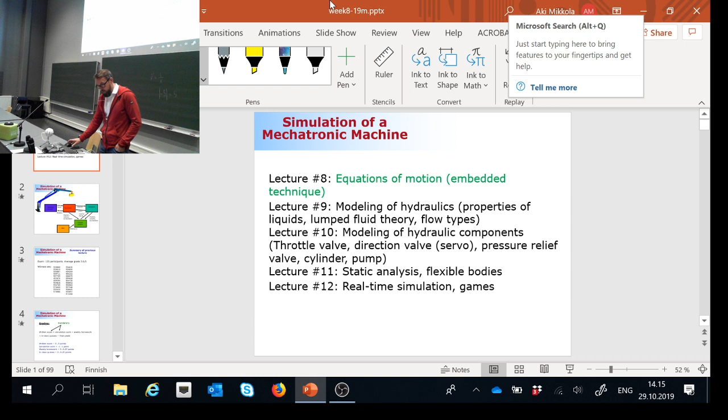All right, so let's get started. It's 2:15, and as you notice, the lecture time is different than what it used to be. Keep in mind it's going to change pretty much every single week from now on. Next week is no longer going to be on Tuesday, but on Thursday, and the time will be different too, I believe. So put that in your calendar, otherwise it will be very difficult to follow the lectures.

Again, what you need to do in this second period is follow the lectures every single week, because otherwise you will soon recognize that you're completely off and have no understanding of what the subject matter is about. Okay, so what happens in this period?

I'm planning to deliver 5 lectures. They may be 6 lectures depending on my speed, depending on your activity, depending on how much you want to discuss with me. But what's in my original schedule is 5 lectures.

Today we'll get started by looking one more time at multi-body system dynamics. And by the way, this will absolutely be the last time we look at that. We are not going to revisit that topic any longer once today's lecture is done.

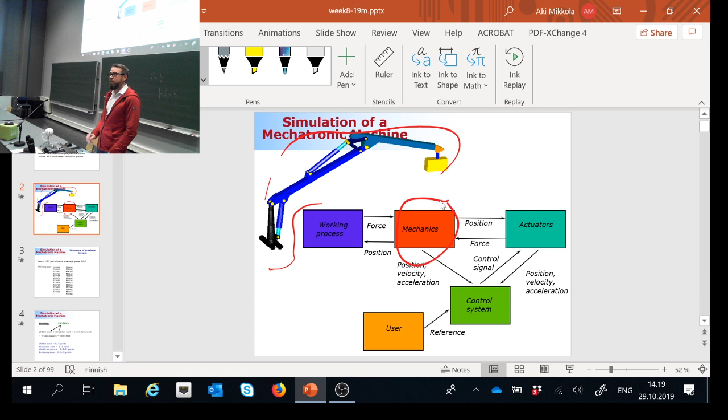And we know how to model them now using multi-body system dynamics. But you know that the mechanical structure is not the machine if there are no actuators. So there has to be a means of introducing motion and forces to a mechanical structure. And those means could be many different ways that you can make it happen.

You can use hydraulics, which is very often used because the power density is very high. But they could also be electric drives, pneumatics, water hydraulics and so on. So it's a wide variety of different options. This course we're going to just look at one option, and that's hydraulics. That's going to cover this box here.

Shortly, I will explain how a control scheme can be added to your simulation model. And then when I'm explaining about real-time simulation, that's the way you can account for the user in your models, because in real-time simulation models, the operator is a user. So that gives you a little bit of understanding how that is possible. We're really not going to touch much on the working environment because that varies so much depending on the application. But there are some examples I'm introducing in that real-time simulation / gamification lecture. Okay, so that's what's going to happen.

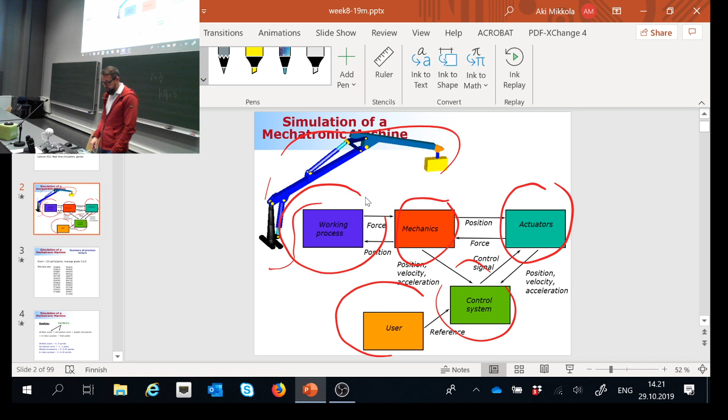So, midterm exam. I got a total of 125 participants, which is a good number. I believe there are 145 students registered to this course, so 20 students disappeared. I don't know what happened to them, but obviously they did not participate in the midterm exam.

Average in total was 3.6 out of 5, so 5 is the maximum. In my mind, you were scoring really well, really well. And then we got a bunch of students who were scoring 5 out of 5. The exam was constructed such that scoring 5 out of 5 was very, very difficult to do. Even a minor mistake, minor misinterpretation in one single incident was enough to lower your points such that you were scoring 4 out of 5. 5 out of 5 is an absolutely outstanding achievement.

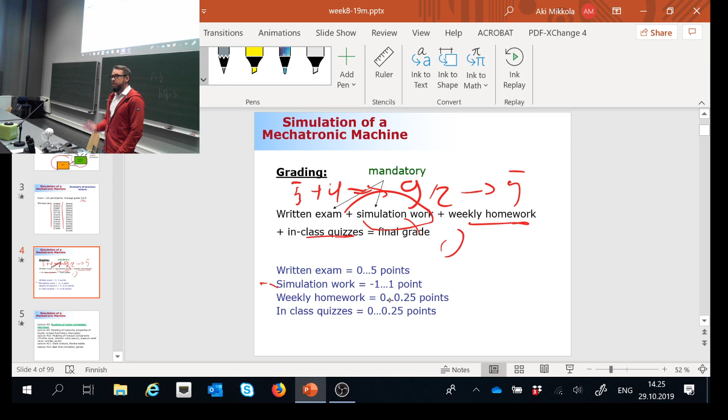Now, simulation work, as listed here, can give you 1 additional point. That's not very common; the common scenario is that you get 0, meaning it will not affect your grade at all. Okay, so let's hypothetically say simulation work will be worth 0. Still, it's going to be 5, and then you're doing your weekly homework and in-class quizzes. Both will give you 0.25 points. So here's 0.25, here's another 0.25. When you put these together, it's going to be 0.5, and it will be rounded up again. So 5 plus 0.5 will be 6. 6 out of 5.

But that's the time when the student affairs office comes after me and says, Aki, you lost your mind. You know, this is not possible, this is not physically possible anymore. So maximum point is 5 out of 5.

Keep that in mind, because of course I would like you to learn and I would like you to enjoy this course. But unofficially, I know this goes to streams and it's going to be recording, but unofficially, I would like you to follow the principle called minimum energy principle. You know what that is?

Minimum energy to scoring high. If you're scoring 6 out of 5, you end up to have 5 out of 5 as your final grade. So you are investing too much energy for this one single course, because there are other courses as well. So keep in mind that the 5 out of 5 is absolute maximum, and that already is a very, very good number. If you're scoring 3 out of 5, that already is very good. So this course is important, but other courses as well, trying to maintain the balance, such that you're scoring high from these courses and scoring high from other courses as well.

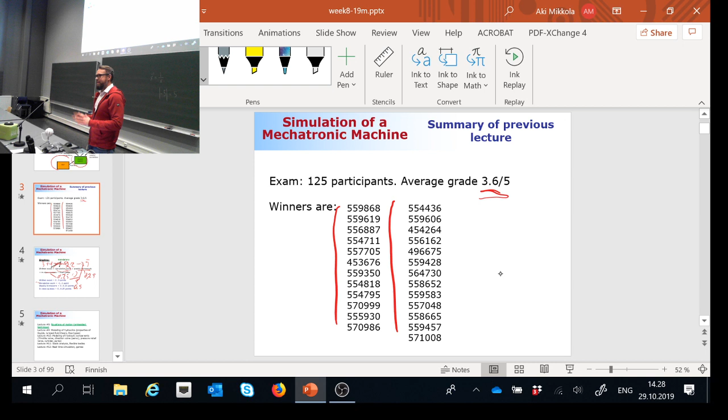Remember just one example, there was a simple case about a beam-like body. Remember, it was like this. And then there was a particle at the end of the beam-like body that was located here. And then the global coordinate system was located at the origin of this beam-like body. And then there was a body reference coordinate system.

It was mentioned that this angle here was 45 degrees. You remember that? And the question was where this point is located with respect to the global coordinate system. But honestly, do you need that information to solve it? You don't. It was obviously visible in the picture, on a figure like that, but you don't need it, because you can solve the problem by using common sense.

Of course, there's a little bit of confusion, because I'm always telling you that you are never ever allowed to take a shortcut. But I also say that you're allowed to use common sense. Or did I? I did. Okay, that's good. So then I'm safe. I did not mention anything about common sense. Or did I? I said, okay, here's when you need to use your common sense. Because of course you can solve this by using the equation that we are very much familiar with.

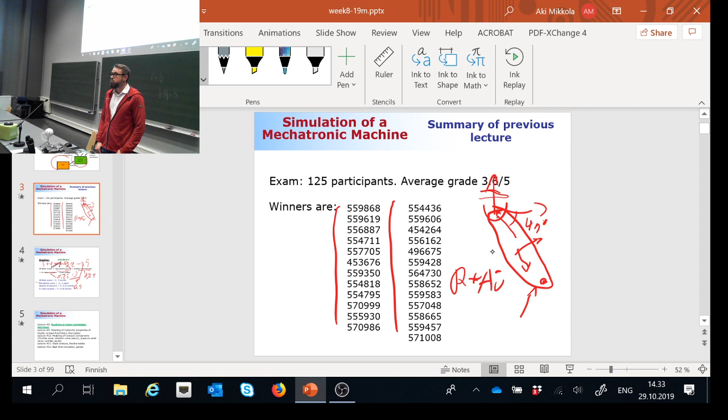Any thoughts? Was the exam fair? I admit there's a problem with it—it's very black and white. If you answer incorrectly you get 0 points, and if correct you get full points. That's something we worked on over the summer, and it will be available for next year's students: instead of just black and white, if you enter an answer incorrectly it gives a warning that it's not correct, lets you think again, but this time reduces the maximum points. That's the improvement I'd like to introduce. No thoughts, no discussion? Okay, I'm happy if you're happy.

Now we'll make one more final effort and look at an alternative way to construct the equation of motion, not based on Lagrange multipliers. Remember a few weeks back, when I explained Lagrange multipliers, there was a mathematical example where we found an extreme of a function obeying a constraint, and I introduced two alternative ways to do that. One way is adding the constraint to the original function with Lagrange multipliers—that's the augmented formulation we did. But there was an alternative where we substituted the constraint inside the original function. We can follow that procedure in multi-body system dynamics too, substituting the constraint inside the equation of motion. This is handy because it produces a minimum number of differential equations. Previously we added constraints, increasing the number of unknowns; this time we eliminate unknowns, so a system with 1 degree of freedom, regardless of the original number of generalized coordinates, needs only 1 differential equation to solve the response. That's what I'll explain next, and then we'll move on to hydraulics.

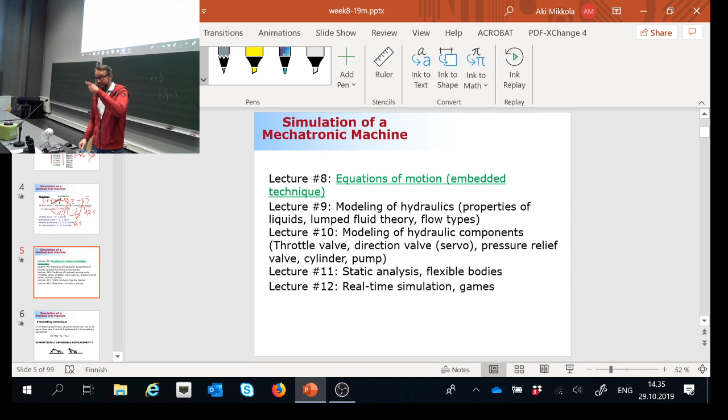All right, so the embedded technique—let's get started, let me explain the whole story, let me show how it goes. This story makes sense, at least in the beginning. Towards the end we approach a phase with a bit more involved mathematics, but it's very important that in the beginning you pay full attention to the concept itself, because that's what I expect you to understand—how this differs from the augmented formulation.

Everything started from this equation we obtained a couple weeks back: the equation you get when you set the virtual work done by externally applied forces equal to the virtual work done by inertial forces. Here we have generalized inertial forces—mass multiplied by acceleration, plus the quadratic velocity vector. Externally applied forces are expressed with this vector, the generalized externally applied forces. So external applied forces and inertial forces are set equal. Now, in general you cannot set this equation equal to zero, and indeed you cannot.

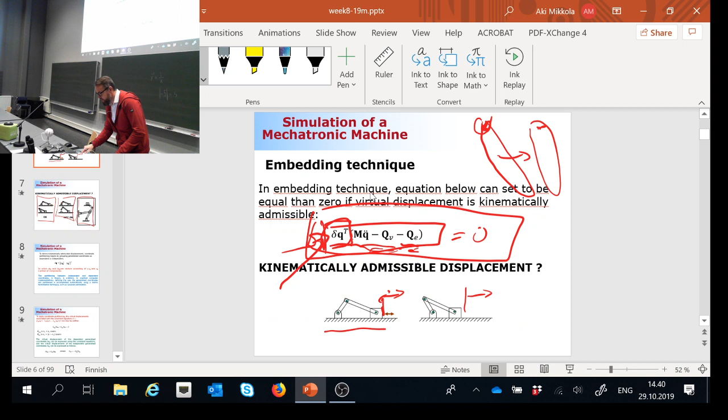So the ultimate goal is to express virtual displacement such that it is kinematically possible, in an automated way, because we cannot do this manually. We could do it in the case of a crankshaft mechanism like this, but in the case of a mechanism like this one here, it becomes too heavy to do. That's why we have to find an automated way to make it happen. Now the automated way is as follows.

So we're going to take a look at the coordinates that are defining our system. Remember, those coordinates are called generalized coordinates. Now what we're going to do is categorize these coordinates into two different categories: the one that is called dependent coordinates - I'll get back to that, what are the dependent coordinates - and then the rest will be called independent coordinates.

Generally speaking, you can do this selection as you want. There are some rules - we'll get back to those - but for sake of simplicity this time, let's just say you can do the selection as you please. The only important thing here is the number: how many coordinates have to be set as dependent coordinates? Well, the number of dependent coordinates has to be equal to the number of constraints in your system. Let's get back to this crankshaft mechanism, the one shown here.

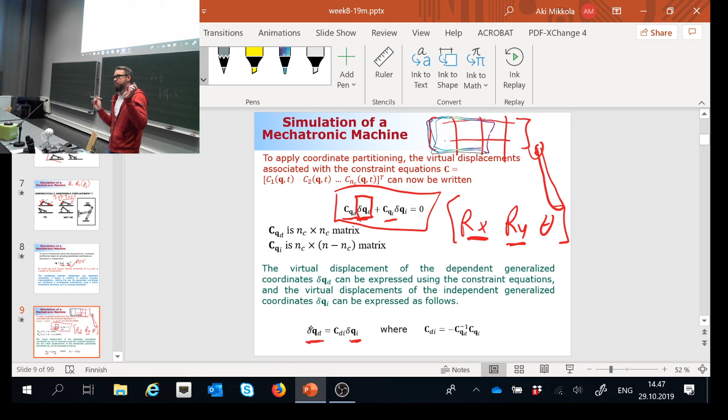Why do I want to do that? Because once I use this equation here, it is possible to solve for the dependent coordinates from the equation. And the dependent coordinates can be written as shown here, with the help of the independent coordinates. So that's the trick I wanted to do: I wanted to find a relation between the independent and dependent generalized coordinates. And actually, what I wanted to do is find a relation between the independent generalized coordinates and all the generalized coordinates. That's really what I would like to do.

So, but I'm very close to doing it, almost there. Don't need much to finalize the thing. Okay, what I have here, what is the mapping here? The mapping is that the dependent part of the Jacobian matrix is inverted and then multiplied by the independent part.

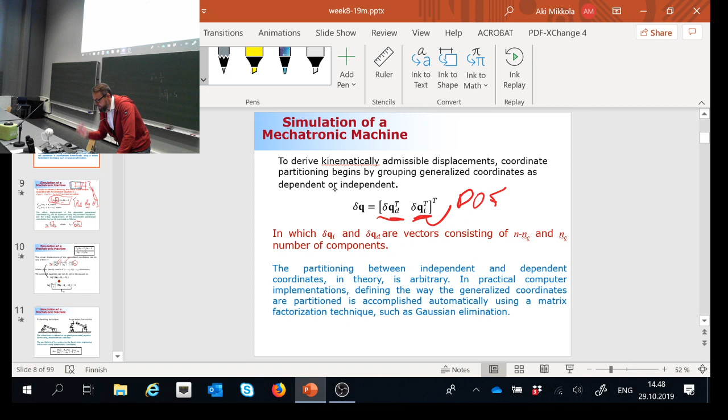You follow me? We're going to take a look at an example in a second, so that's when things become clear to you. Now, all the generalized coordinates can be written as dependent and independent. Using the relation defined in a previous slide, you can find a relationship between independent generalized coordinates and all the generalized coordinates, like here.

So that's exactly what I need. That's what I'm after all the time. Why is this important? Because now it is possible to use this relation here, substitute it here in this equation, and express the virtual displacement using independent generalized coordinates only, and others will follow.

Why is this important? It's important because then it is possible to introduce the virtual displacement in a way that is kinematically possible. Let me summarize this shortly. This is how you can express the virtual displacement such that it is kinematically possible.

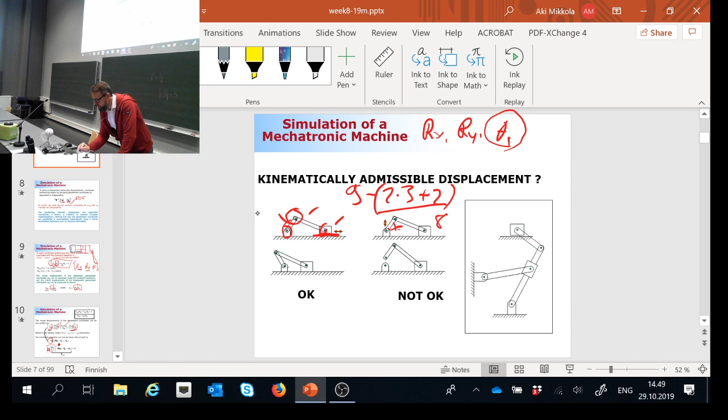So again, let me go up here. Let me explain it here. Let me go even up here. So this is where I'm going to get started. This is a short summary.

My ultimate goal here is to express this virtual displacement such that it is kinematically possible. I'm going to do this by using independent generalized coordinates, and the number of independent generalized coordinates equals the number of degrees of freedom. Then I'm going to make it possible so that other coordinates follow according to constraints. This is done by categorizing coordinates into dependent and independent.

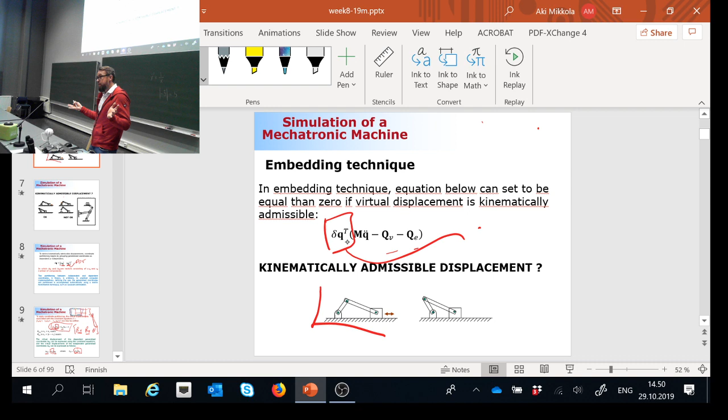And again, you can do this selection as you want. Then you go ahead and use this same selection in your Jacobian matrix. Once you do it in your Jacobian matrix, you can find the relation between the independent and dependent generalized coordinates. This happens with help of constraints, because the Jacobian matrix tells you, if you introduce motion to one coordinate, how the other coordinates will follow.

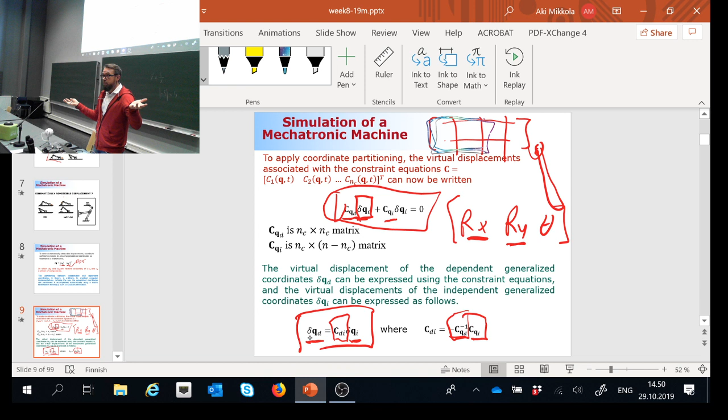Okay, makes sense? Now you use this relation, as shown here, in your expression of the equation of motion, and now you can set this equation of motion equal to 0. Now you have only a very small number of differential equations, because look what's here - this is only independent generalized coordinates, nothing else.

Make sense? Is it difficult? It is difficult, I can admit that. Again, I was telling you this story that this course is pretty much downhill from this point on, just enjoying life and talking about the weather and so on. It's going to be simple, but there is this one tiny rock in your way.

So this final embedded method - once we're done with that, then we're going to move on to hydraulics. We are not yet completed with the story, but let me ask if you got the concept, because this is a really essential part of this method. You got it? What is that?

Mathematically - okay, so mathematically, well physically, it means that if you have this connection rod, you can select one coordinate and the other coordinates will follow, because there is 1 degree of freedom in the system. So you can select pretty much whatever coordinate you want.

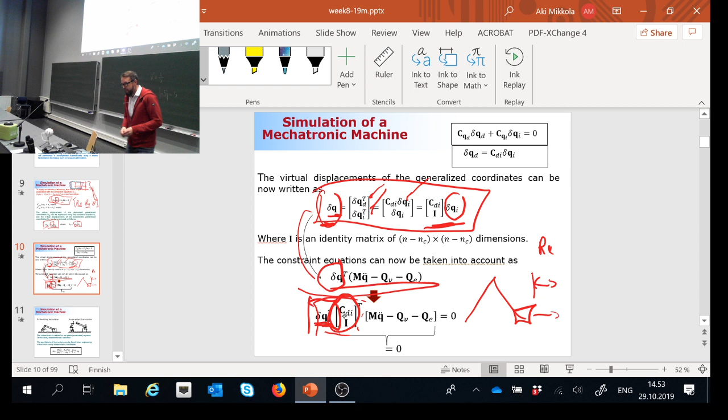Okay, so if I move it like here, if the piston goes here, then these two bodies will follow in a certain way, and this certain way is expressed here. That's how it goes, that's the idea - that's the whole idea behind this embedded method. All right, so let's move on.

Really, the big difference between this method and the augmented formulation, where we introduce the constraint with help of Lagrange multipliers - this is a summary of that. In an embedded technique, we are just looking at the generalized coordinates for the system that consists of 1 degree of freedom. If there were 2 degrees of freedom, then I need 2 coordinates to solve it, not more than that. But once I follow this procedure, I don't know what the reaction forces are due to the constraints, because the constraints are substituted inside my original equation of motion.

An alternative way was this method based on Lagrange multipliers. In that case, I'm solving each one of the bodies, and I'm solving the reaction forces because of the constraints. So conceptually, very different, very, very different. Okay, let me ask you this.

Remember this, let me make this easier than that. So if you have a double pendulum like this.

And if you would follow this augmented formulation, what would be the number of unknowns in that case? How many unknowns do you have to define? Can you solve it?

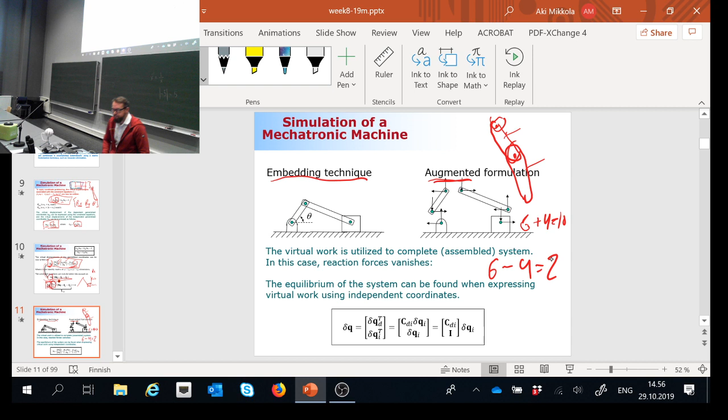You got it? Okay, so here's a summary. Everything started here with the concept of virtual work. And now we're going to express this virtual work, the virtual displacement, in a way that is kinematically possible.

First we're going to use this chain rule of differentiation to find the relation between global coordinates and generalized coordinates. Then we're going to go one step further: we're going to find the relation between independent generalized coordinates and all the generalized coordinates. That relation is the one you can find using the coordinate partitioning technique.

Putting all the packages together, this is how the virtual work can now be written. And look at what I have here: only the independent ones are left. The others disappear. You got it?

Yes, can do. It's almost like a miracle happens here — it disappeared. In the previous case they were added, and now they disappeared because they were substituted inside. That's why they disappeared, okay?

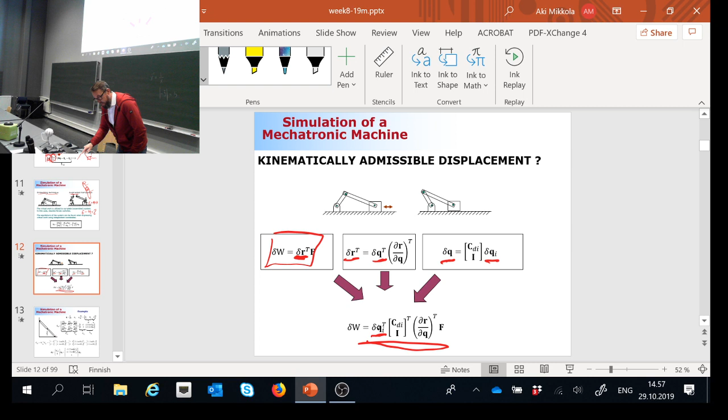Makes sense? Let's look at one example, and then I'm going to take a break. This example is to find the static equilibrium. I'm applying this to statics, not dynamics, but just to clarify the concept a bit.

I want to use this mechanism that we looked at in a previous case. Remember, this is what we solved using MATLAB. So this system consists of one moving body, so it needs 3 generalized coordinates, and a primitive joint here and here, so it's a total of 2 constraint equations that are needed.

So using this substitution technique, I can only get one equation to define the static equilibrium — nothing more than that, just the one equation. So how does it go? Let's take a look.

First, let's look at what is the vector of generalized coordinates. That vector is R. Well, now it is a bit unclear, so it's defined as R1, but what I mean of course is Rx here. Then I have Ry here, and angle theta. So those are my generalized coordinates.

Now I'm selecting 2 of them to be dependent, and the rest will be independent. I'm simply selecting the first 2 to be dependent, meaning 1 will be independent. You follow me? So Rx, Ry will be the dependent part, and theta will be independent.

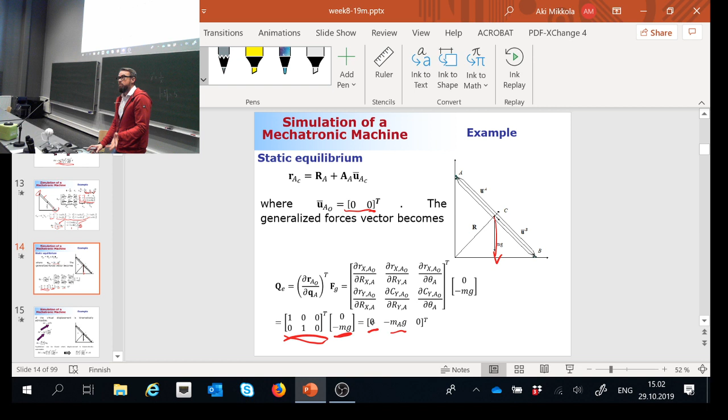It's very simple. I'm going to use the vector u part that turns out to be a 0, 0 vector. With that, I'll have my mapping matrix, which reads like shown here. Now multiplying my externally applied forces with that mapping matrix, I end up with generalized externally applied forces consisting of 3 components: 0, minus mass multiplied by gravity constant, and 0.

Now my final step: I'm going to use the concept of virtual work to find the static equilibrium. There's only one force applying, the gravity force. I want to find where the static equilibrium of the system is with the information I have. So I want to use this equation and set it equal to 0. The only way to make that happen is to express this first with the help of generalized coordinates, and more importantly, with independent generalized coordinates.

Good? So we're good? I'm always a little unsure whether you're following me, or thinking, oh my God, when is the break? I can tell you, 2 minutes. Within 2 minutes, so hold on, try to hold on. 2 minutes and then you're good to have a rest.

Okay, so then this goes here. Now this is a critical step, because this is the way we can express the virtual displacement such that it is kinematically admissible, kinematically possible. No further thinking, so I'm going to keep substituting things here, and then, and only then, I'm able to set this equation equal to 0. So this is how it goes.

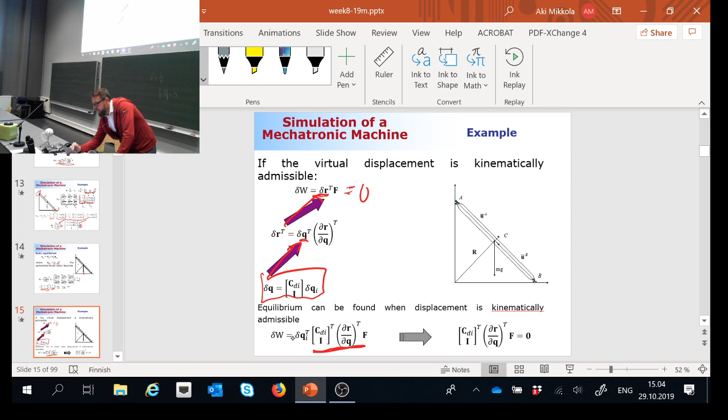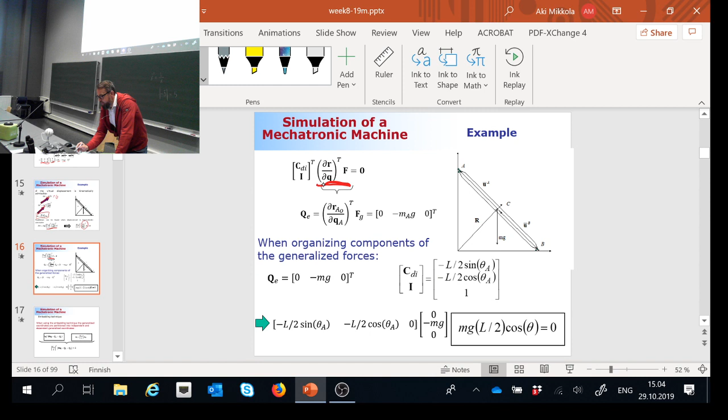So this is all the mathematics I explained to you. This is going to be first the generalized externally applied forces, and with help of that mapping matrix, I can set this equal to 0. So this is my generalized externally applied forces, and this part here follows the kinematics. Once I multiply this kinematics with my forces, I end up with one equation.

From that equation, you can solve for the angle theta. When cos theta becomes 0, that's your static equilibrium. It becomes 0 when theta is 90 degrees, or... how much? 90 degrees, plus 180, so 270. Correct, so there are two configurations.

Oh my God, very bad drawing. Like this, or the other way around, flipped over. Those are the two possible places where you can find a static equilibrium. Happy?

Okay, final step, right after the break, I'm going to introduce how you can bring this into dynamics. So there's one more step to take, and then we're good.